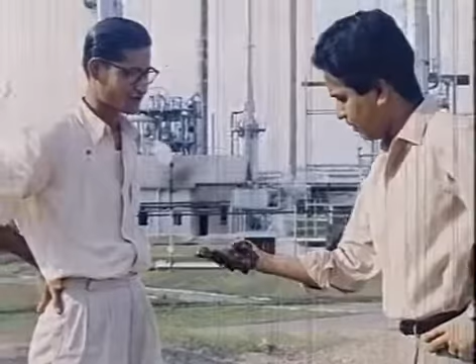This is oil. Thick, sticky crude oil. Black, dirty and unrefined. It's got a long way to go before it becomes fuel and lubricants, candle wax and chemicals. It has, in fact, 700 miles to go, from the wells in Upper Assam to refineries in North India. Only a pipeline can make economic sense of such a journey.

So the sticky mess must somehow be persuaded to flow freely down 700 miles of pipe through little peasant holdings, which are the livelihood of small families, and great commercial tea gardens that are an important part of the economy. The wells and the refineries are both within the huge subcontinental state of India. And whilst agriculture is important, oil fuel supplies that do not have to be imported are precious beyond price in a land that's straining every fibre to become a self-supporting, modern industrial state.

This is the upper part of the Indian subcontinent, with Assam on the right, and the barrier of the Himalayas at the top, and the route of the projected pipeline tracing itself slowly along from the oil fields, past formidable natural, economic, and political hazards to the refineries. Pumping stations boost the flow of crude oil at intervals. Very special pumping stations, for there is no fuel available along the pipeline save the crude, muddy oil flowing through it.

The usual way of starting a big engineering project is to advertise the job in the press and let people who understand the work tender for it. In this case, the paper was the London Times, a copy of which was delivered as usual at the offices of W.H. Allen, Sons and Company of Bedford in England, who understand diesel and electric power very thoroughly indeed.

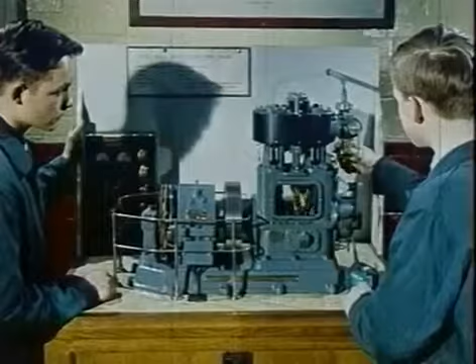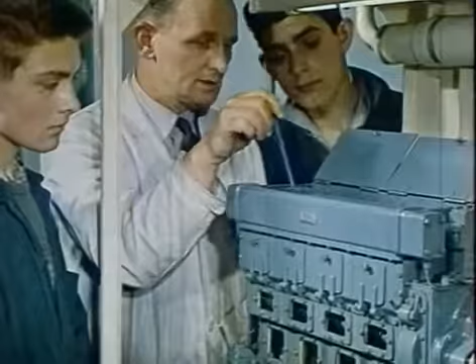This scale working model of an engine was made by the apprentices at W.H. Allen's in their own training school. For any firm which intends to keep abreast of the fierce technical competition in modern industry cannot rely on chance for its supply of trained and expert personnel. And these boys may become the heads of departments who, not so many years ahead, may be making the same sort of decisions for the firm that are now being discussed by the chief designer and the manager of the diesel department.

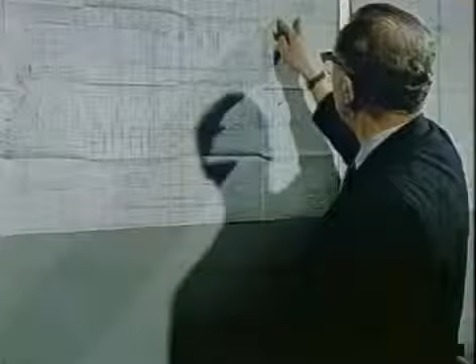Once the specifications have arrived, the various design teams have to assess the difficulties, decide whether tried and conventional equipment will do the job, or whether special modifications or even entirely new designs may be called for. In the case of the diesel engines to power the pumps and electric generators along the North India pipeline, the biggest problem was fuel, for only the crude in the pipeline or natural gas from the wells was readily available, and the specification called for an engine which could use either at the turn of a switch.

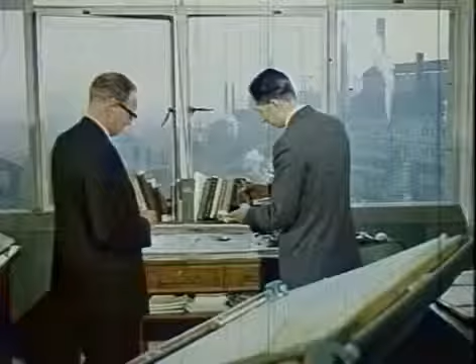This was nothing very new in engineering, but the crude from the Nahorkatiya wells was a problem, as its high wax content makes it physically intractable and its low flash point requires respectful handling. Probably at no point in design more than now during the pre-tender work does that indispensable but unassessable quality of specialist experience play a greater part, because it's at this stage the fundamental assumptions must be made and decisions taken which will have to be turned into successful engineering and viable economics when the contract is placed.

That's why every tender has the full attention of the best brains from the word go, and why there's no room at all for bluff, which would be called without remorse by the very forces of nature which it is the engineer's job to harness. The same quality of concentration on the work of tendering is applied to every inquiry, despite the fact that only a proportion result in orders.

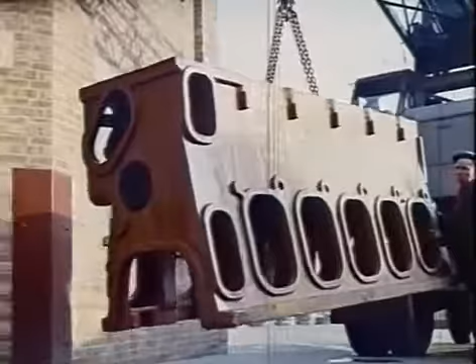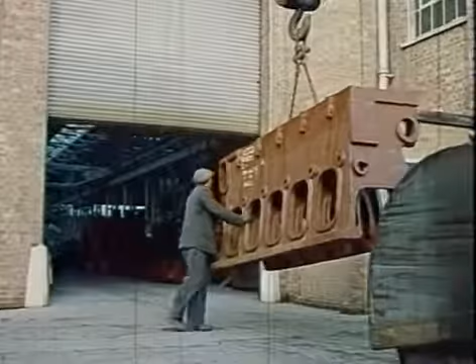In this case, the particular solution of the engineering problems involved enabled an order to be obtained in the face of world competition. The arrival of heavy hardware from subcontractors is the visible evidence of the beginning of production, adding, as it were, a new ground bass to the everyday racket of the machine shops.

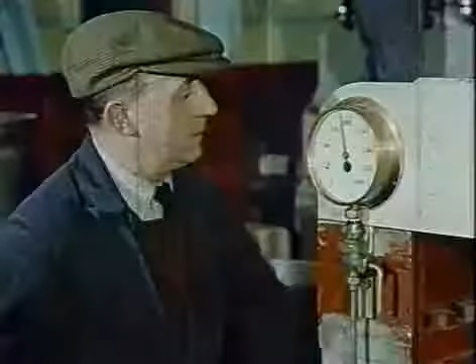From an early stage of manufacture, testing is constantly carried out. Here, a cylinder liner is being tested well in excess of its normal working pressure. And here a technician is satisfying himself as to the parallelism and diameter of a crankshaft.

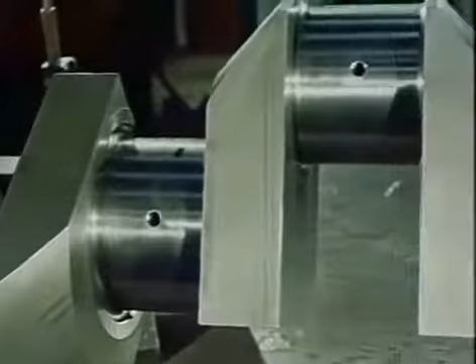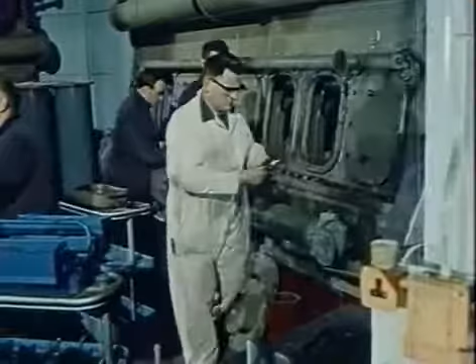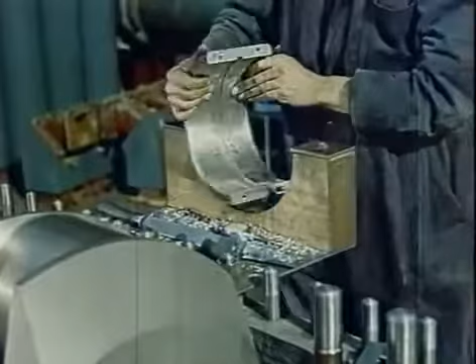Inspection and checking generally fall into two classes: control of manufacturing quality and accuracy, and the inspection of parts and indeed whole machines after test running under actual working conditions. To do this, the whole unit must be assembled and run, and before proceeding to this, it would be as well to take a look at the system of supplying fuel to one of the engines, remembering that this fuel is thick, crude oil.

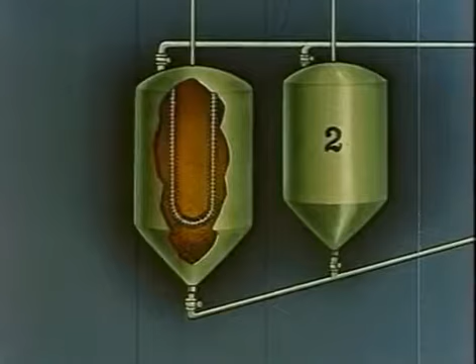First of all, we have two conical bottom tanks, each holding 1 day's supply of oil and fitted with tubular hot water heaters to improve the viscosity of the oil by raising its temperature to about 100 degrees Fahrenheit. In order further to purify the now warm and therefore more tractable but still very dirty fuel, the sludge is allowed to collect in the conical bottom and drained away.

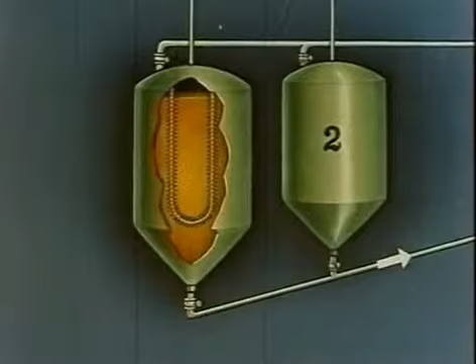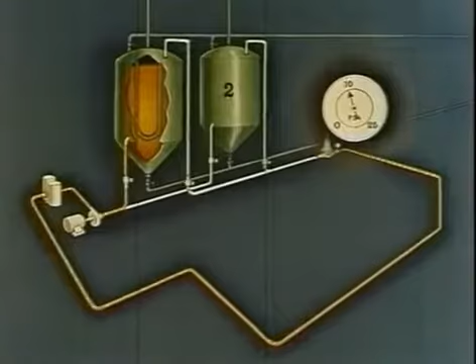The settled fuel is drawn from the tank in use by a circulating pump in a ring main system round each pumping station. It's passed through the main filter, then circulated in the ring main. Pressure in the system is controlled by a regulating valve at a normal working level of 10 pounds per square inch. The cycle is continuous, in that surplus oil is returned to the tank, then recirculated in the ring main, which is insulated to reduce heat losses.

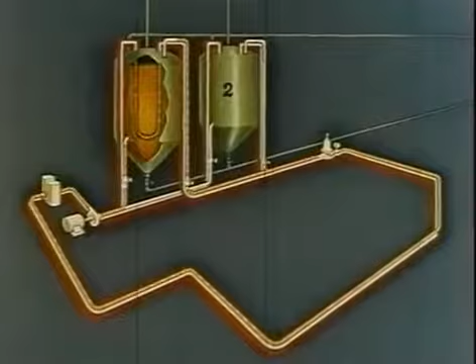When the engines are running, oil is constantly being drawn from the ring main system by the fuel injection pump at a rate less than that at which the oil is circulating, thus ensuring that a reasonable flow is always maintained in the system. That was a simplified picture of the fuel ring main. But in fact, it looks rather less neat and tidy when seen, as it is here, applied to a typical works research unit.

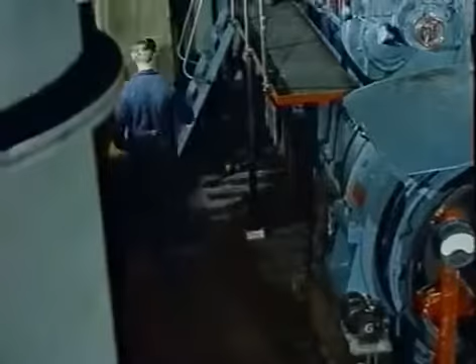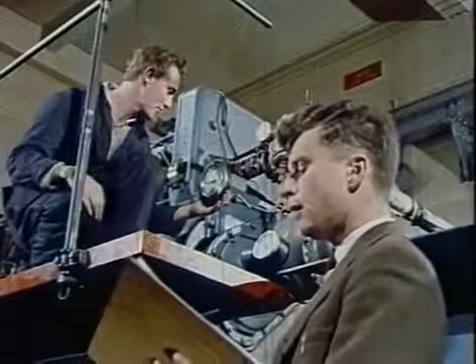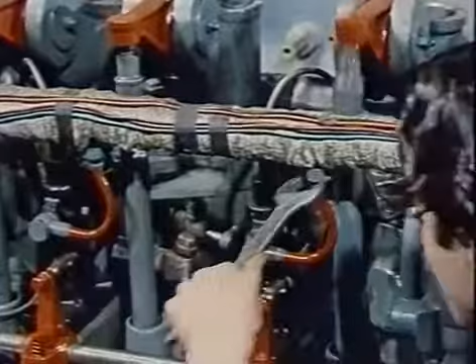This engine is first run on ordinary diesel fuel, and its performance is recorded. The pipework running along the top of the engine is in fact the ring main, which will shortly be carrying not clean diesel fuel, but this specially imported sample of crude oil from the wells at Nahorkatiya.

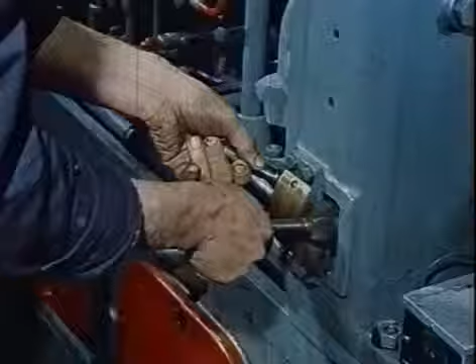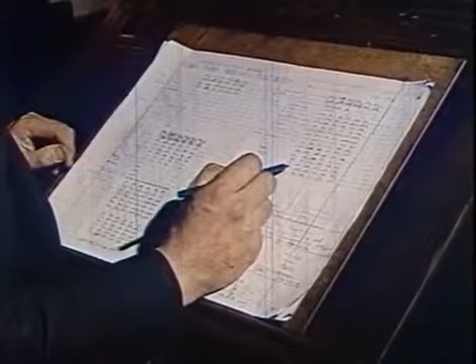For the test with crude oil fueling, the engine is started on diesel oil. This time, no prolonged test is made with the conventional fuel, and after a minute or so, a lever is moved, and the ring main starts to feed Nahorkatiya crude to the engine. Now the engine will run under load for 500 hours, and frequent readings will be taken at the engine and at the generator which it's driving until the great mass of data required has been accumulated.

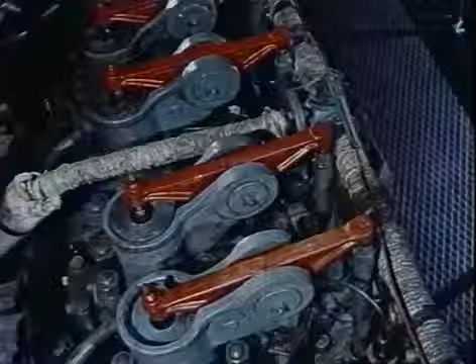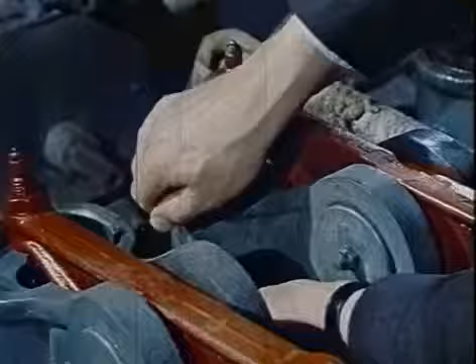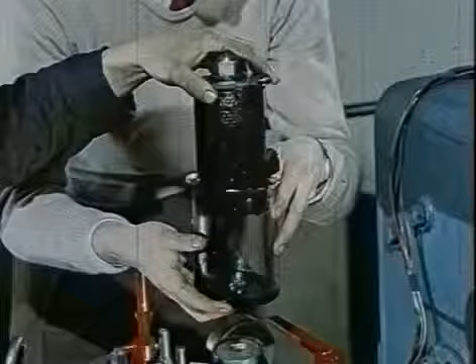The first performance figures are important to all concerned. It's also important to know just what is going to be left in those ring main filters after 500 hours of running a really big diesel like this on what is, after all, a purely fortuitous mixture of highly volatile petroleum products, something uncommonly like candle grease, and a lavish dash of good old Mother Earth, sand and all.

This is where the filters, which later on will have the highly important job of keeping the worst of the foreign bodies out of the engine, do an extra job of showing just exactly what they can trap, and therefore, by implication, what is likely to be offered to the engine as fuel. Dirty enough stuff it looks to the naked eye. But under the microscope, it's hard to believe that any engine would accept it as fuel.

That's the sort of fuel the engines will have to use to move 700 miles of waxy, sulky crude. But what sort of engines will they be? Well, first of all, the fuel situation along the pipeline dictates the basic engine design. At Nahorkatiya, the enormous supply of natural gas, some of which hitherto had been flared off, was to be used as fuel, in conjunction with a small percentage of the crude oil from the same important local wells.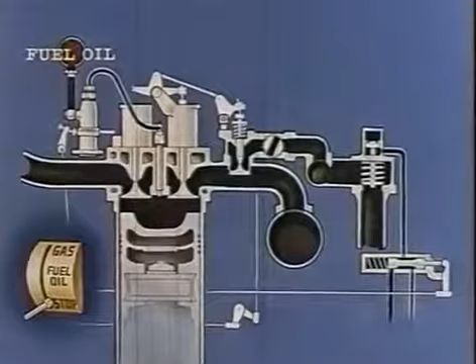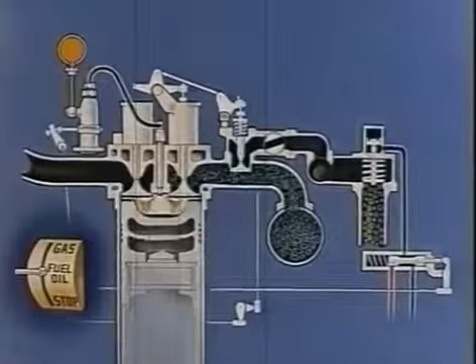Where gas was available, the answer was a dual-fuel engine, one which can run on liquid or gaseous fuel, the gas being ignited by a small amount of liquid fuel. The engine is started, and to begin with, runs on liquid from the pipeline, like every four-stroke diesel. But once it's running on oil, it can be switched over by manual control to run on gas. This changeover does not interrupt the output of power.

When running on gas, the consumption of oil is reduced by over 90%, and in the event of a failure in the gas supply, the engine reverts automatically to oil, at the same time closing the main gas valve, which eliminates any possible danger when gas pressure is restored.

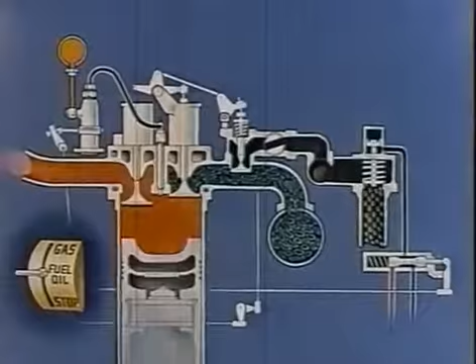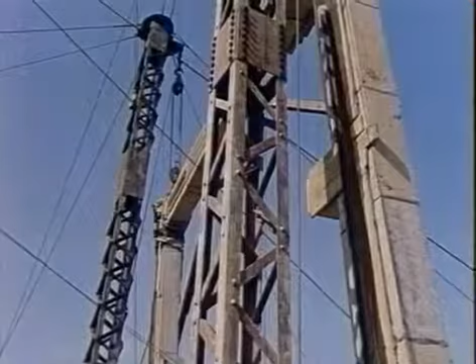By now, the contractors out in India are beginning to show results in the work of erecting the pumping stations along the pipeline. For the first time, it's possible to get a more than purely theoretical idea of where everything is going to be put and how it's all going to fit together. For the first time, too, even the most determinedly professional engineer cannot help but catch a whiff of the heady air of creation that is about.

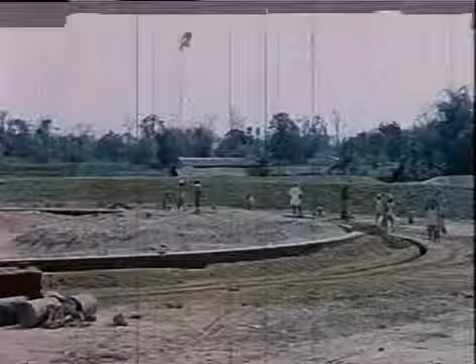For this is going to be more than a big subcontract to a huge undertaking. It's taking part in the explosive emergence of what is a continent in all but name, as a partner in the wonders and responsibilities of the second half of the 20th century. For the pipeline and its pumping stations will be run by Indian engineers, graduates possibly of this very institution in the state from which the crude oil comes.

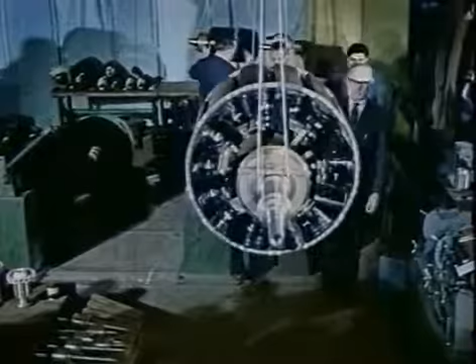India, like every other state at a critical stage in industrialization, is training her technical students wherever the best in knowledge and technique is available, including the W.H. Allen Works at Bedford, where this group is studying work in the electrical shops where the self-regulating alternators for the North India Pipeline's power supply are being made.

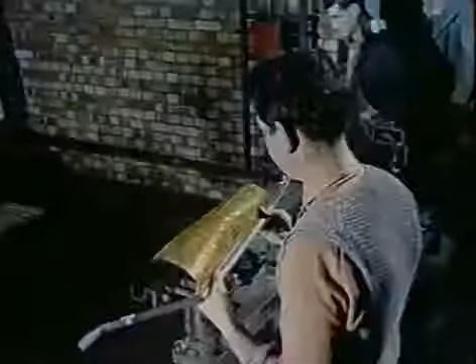No young engineer can get far without a good theoretical training, but nevertheless, first-hand experience of the problems and the skills of the actual builders of modern machinery can do something beyond the power of any textbook.

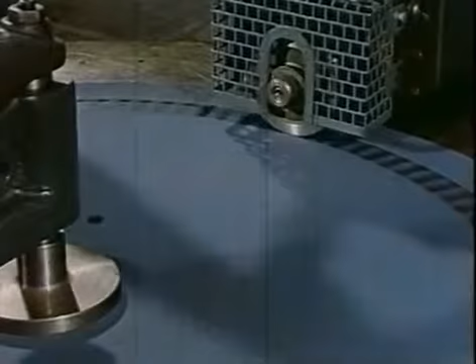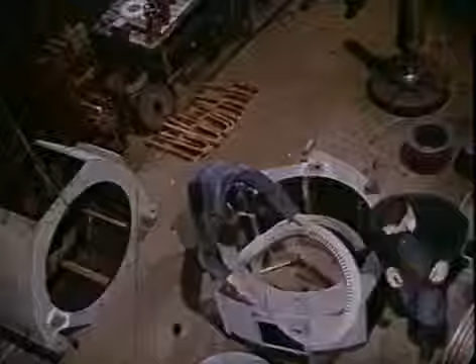The complex organization of manufacture and testing moves forward all the time, each item being fitted to its appropriate neighbor in the scheme and the scale of operations growing all the time until it culminates in the products of the electrical and the diesel departments being coupled together to run the most important test of all, a pair of newly built engines driving two of the actual alternators under load.

This is a test to prove the performance of complete units, but to the layman, it has more than a little of the panache of the concert platform.

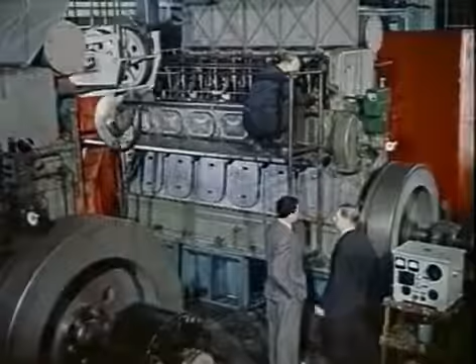This full-scale test is in fact the last of any kind that the equipment will undergo before it is started up on its permanent site in India. For this reason, if for no other, it is attended not only by the members of W.H. Allen's team of specialists, but by the engineering representative of the customer.

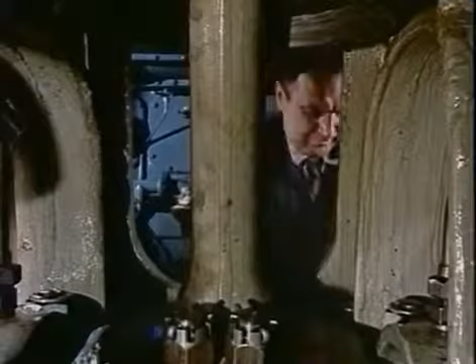No sooner is the engine shut down than a complete dismantling begins. Everything is stripped down to its component parts and a minute examination is made to discover whether any part has in any way deviated from its expected performance, calculated not only on design theory, but from the earlier practical tests.

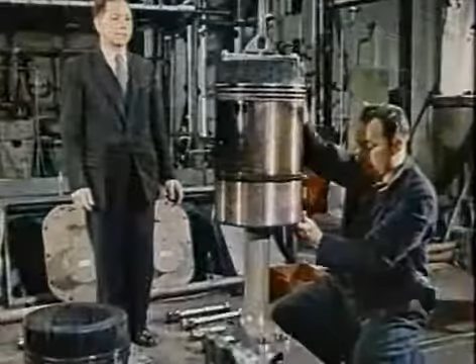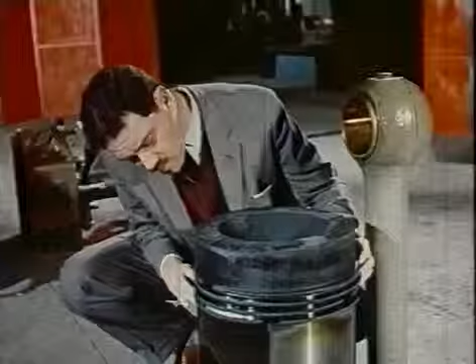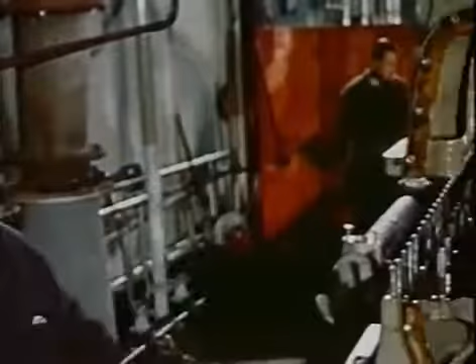Here again, the customer's engineer is very much in evidence and becomes a part of the manufacturer's team in their common search for any sign of abnormal wear. For this is common ground, and maker and customer share a common aim, the best that engineering skill can produce.

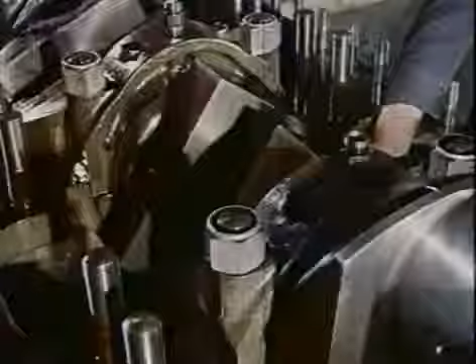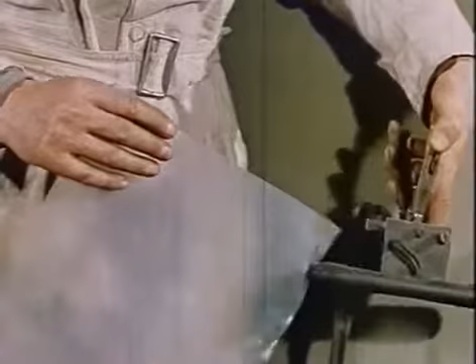As each section is inspected and passed for export, it has to be prepared to withstand the various hazards of the journey. Of these, heat and damp are not the least, and it's necessary to enclose many of the more delicate parts in airtight polythene bags, carefully sealed, and from which the air is then mechanically exhausted.

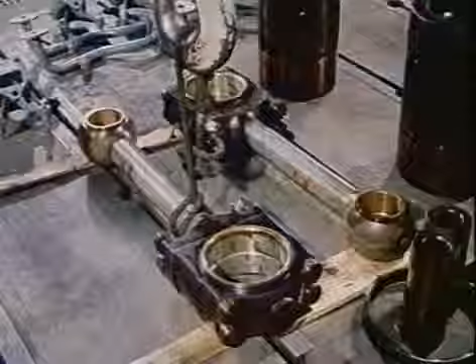This method provides very effective protection from extremes of climate. And of course, the relatively delicate polythene is further protected by waterproofed heavy crates from the more violent hazards of long-distance travel.

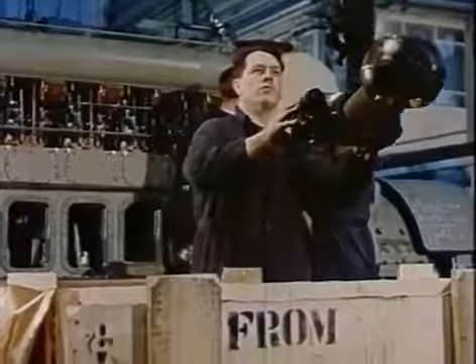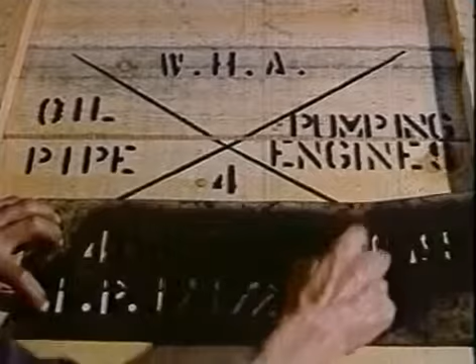Once again, minute care characterizes even the apparently less enthralling processes of packing, and rightly so. For these crates contain the work of many men and many months, and they have a long, hard journey ahead of them.

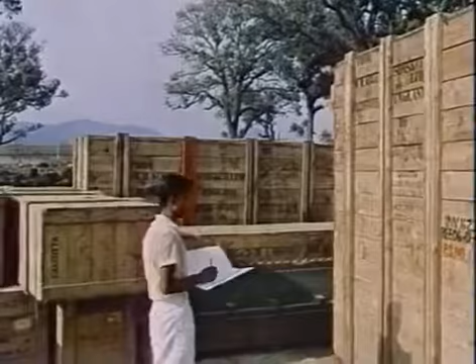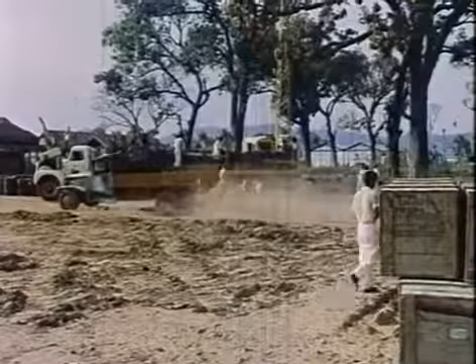Eventually, the whole plant, mechanical and electrical, stands crated and anonymous at the assembly point in India. This is perhaps the moment to reflect on how all this machinery is going to work and who is going to work it. The most important part in the whole scheme of control lies in the second part of the question, for this will be the most advanced pipeline in the world, and the pumping stations will be remotely controlled.

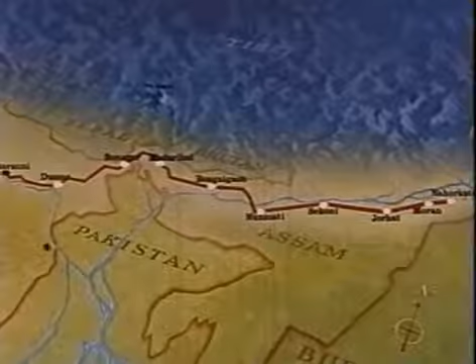This represents an enormous advance over earlier control systems, and months of cooperation between the engine designers at W.H. Allen and the communication engineers were needed. The flow in the buried pipeline will be controlled by a dispatcher who can operate any of the stations by means of an extremely sophisticated control system incorporating a VHF radio network. Most of the control is directly electrical, and for the first time in pipeline history avoids cumbersome pneumatic devices.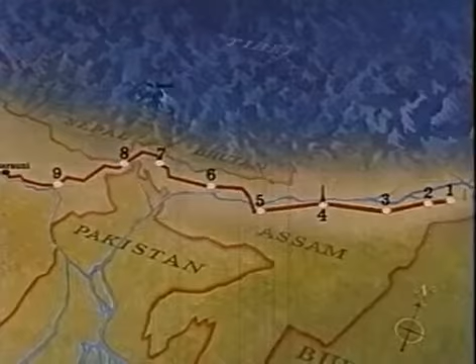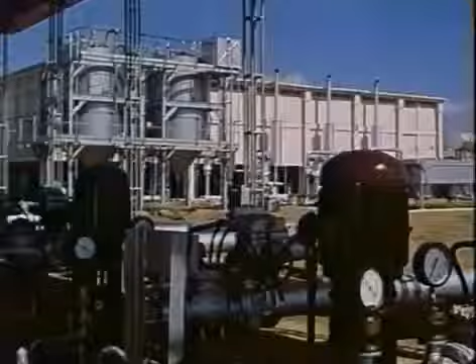There she is, a little smarter in her new paint than the last time we saw her, coupled up to the huge ram pump and ready to go. Once the ring main section looked obscure and grubby in the test bay. Now everything looks almost unnaturally clean and bright in the hot sunshine. You would hardly recognize our old friends, the conical bottom fuel tanks, in these gleaming monsters in the background, but that's what they are.

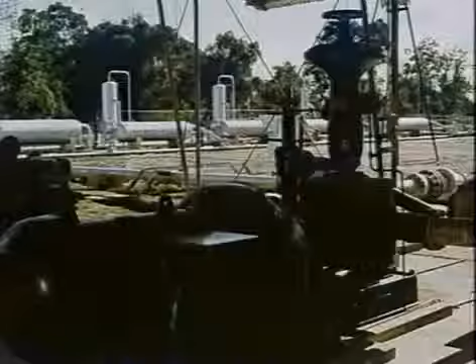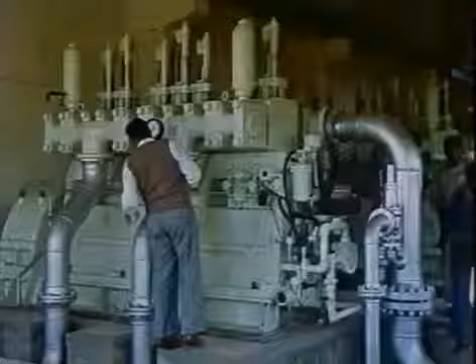Nothing dramatic happens when the power is switched on. Nobody really does anything at all, except one man many miles away. And all he does is press a button. And all along the green foothills of the Himalayas, from Assam to Barauni and far Bihar, 700 miles of oil starts slowly to move westward under the power of 51 diesel engines made in Bedford in England by people who know their job.